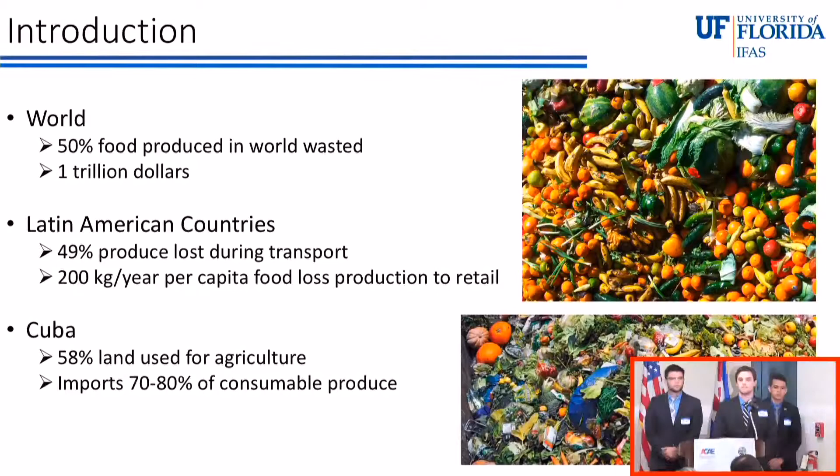Food waste is a major problem in both developed and developing countries throughout the world. Currently, 50% of the food being produced is wasted, which equates to $1 trillion per year. According to the FAO, or Food and Agriculture Organization of the United Nations, 49% of produce is lost during transportation in Latin American countries. Fruits and vegetables are wasted more than any other food product. Cuba is currently utilizing 58% of its land for agriculture, yet 70 to 80% of its consumable produce is still being imported.

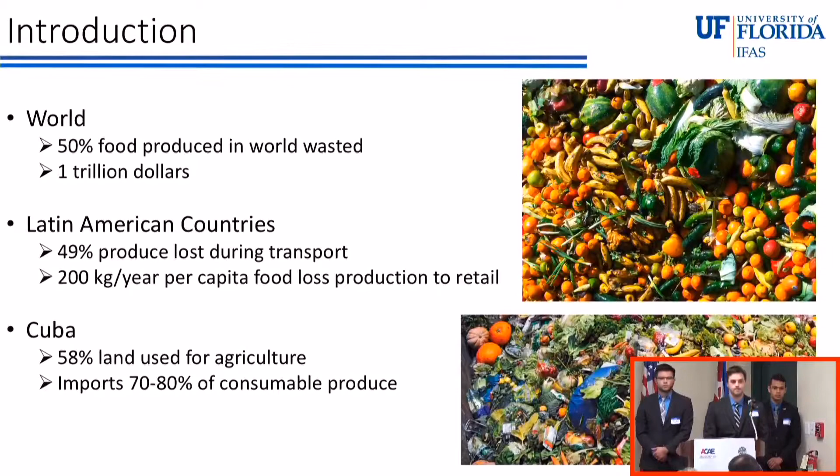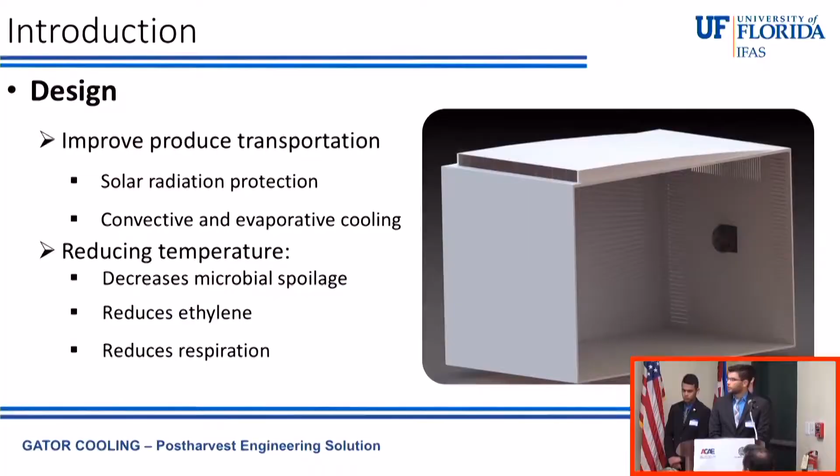Our design attempts to improve Cuban infrastructure by utilizing a shipping container that uses both convective and evaporative cooling, as well as solar radiation protection, in order to decrease shipping temperatures and maintain a more constant shipping environment for produce. Our design reduces temperature, which decreases microbial activity, as well as reducing ethylene production and reducing respiration, which decreases food spoilage.

So a little background information on Cuba. There's currently 11 million people, according to the most recent census, living in Cuba, with an average annual temperature of 21 to 27 degrees Celsius and an average annual high temperature of 26 to 32 degrees Celsius. According to the FAO, one of the most recent studies, an ideal transportation temperature for most produce is between 13 to 15 degrees Celsius. On this picture right here, we can see how the plantains are uncovered and exposed to solar radiation. This is causing problems during transportation.

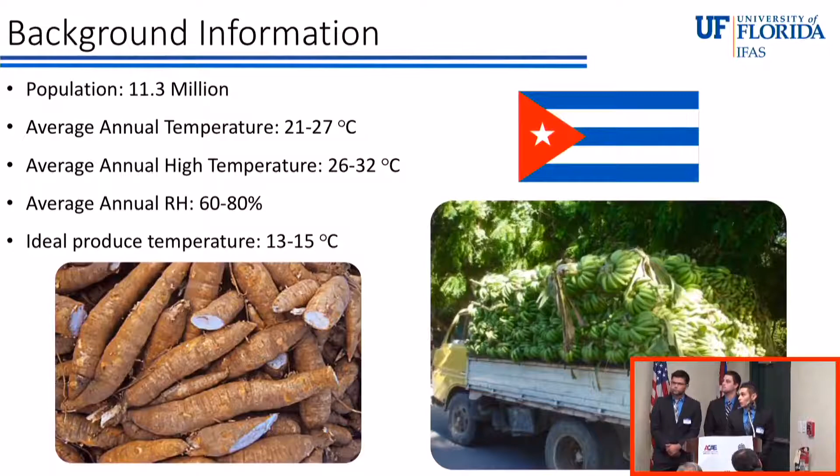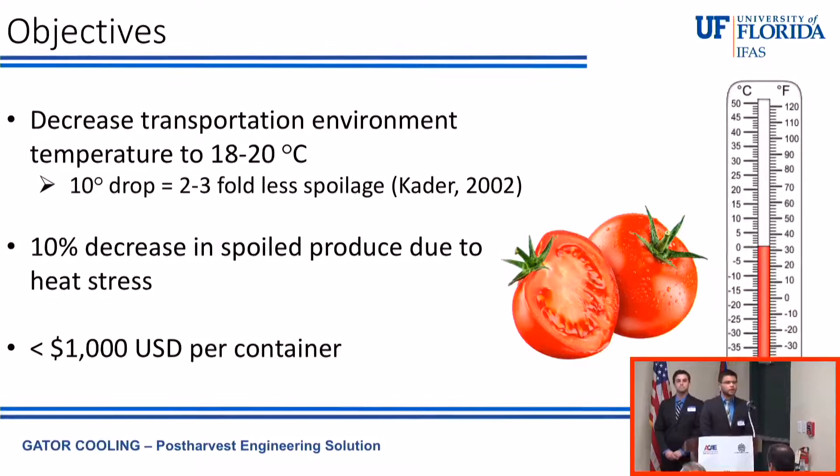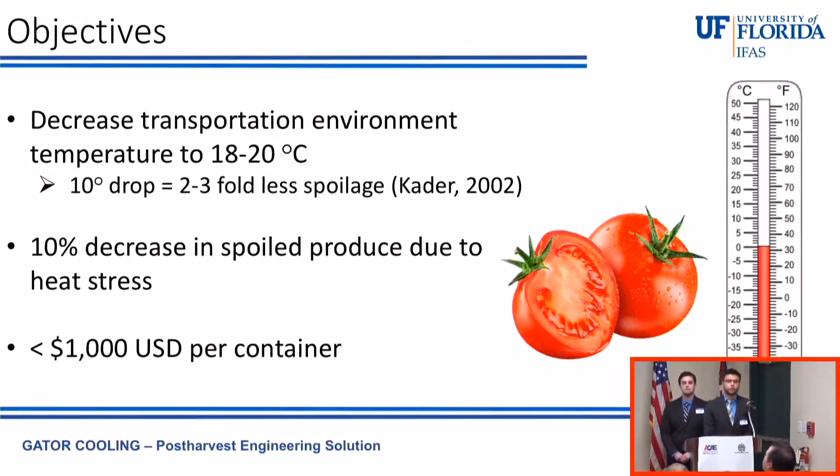So in order to provide the best design possible, we came up with the following objectives. We wanted to maintain a shipping temperature of 18 to 20 degrees Celsius within the container. Although this is not within the range that Diego just stated of 13 to 15 degrees Celsius, a 10-degree drop in temperature usually yields about a 2 to 3-fold decrease in food spoilage. Secondly, we wanted to decrease the total amount of food spoiled by about 10%. Finally, we wanted to maintain the cost of this container under $1,000 in order for it to be more easily implemented by Cuban farmers.

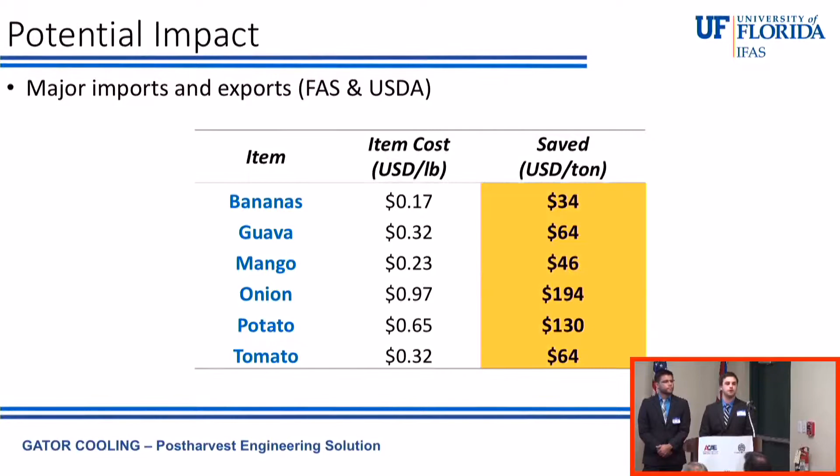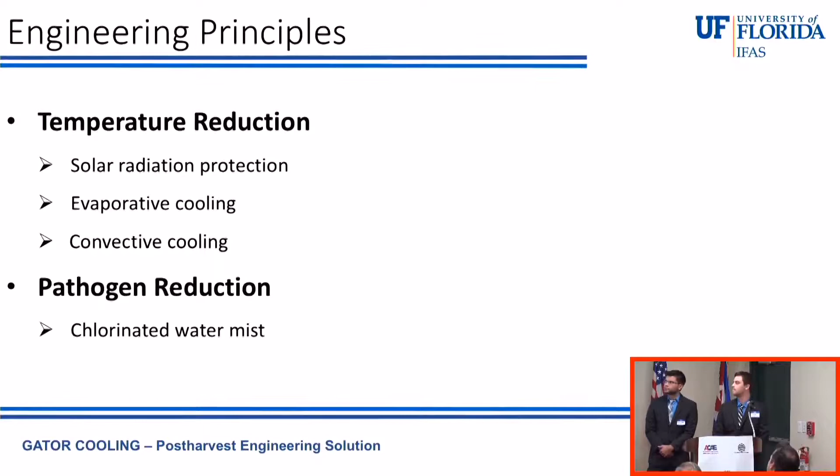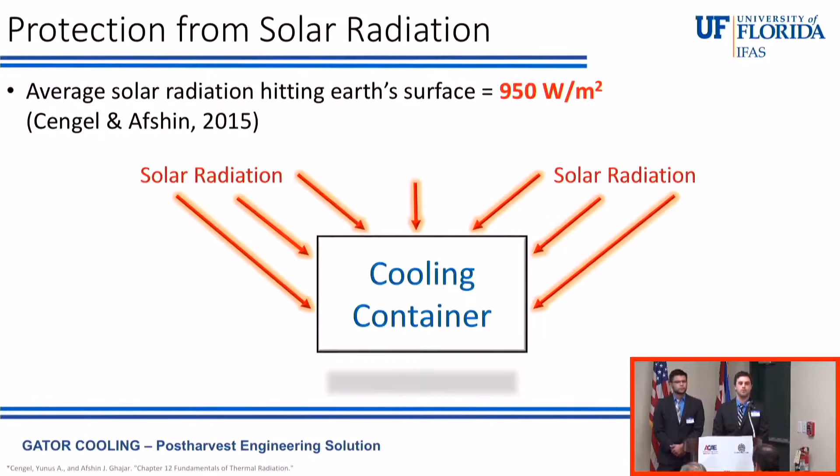Solar radiation is a key source of heat resulting from the sun's rays hitting the produce. It is known that 950 watts per meter squared of solar radiation can affect produce during transportation. Current methods being utilized in Cuba are not accounting for this. By utilizing our design, which covers the produce, and painting the exterior of the container white, this 950 watts per meter squared will nearly be eliminated from becoming an issue.

Evaporative cooling is what makes our design unique and helps reduce temperature even further. The annual wet bulb temperature of Cuba is 25 degrees Celsius, and this can be reached through evaporative cooling alone.

A water tank attached to the side of our container will hold up to 198 liters of water, and this essentially means that it can go in transportation for up to 6 hours of water being dispersed into the fine mist spray. The way it works: the incoming hot air will come in contact with the fine mist spray and then cause an evaporative effect inside the container, decreasing the air temperature inside and cooling the produce altogether.

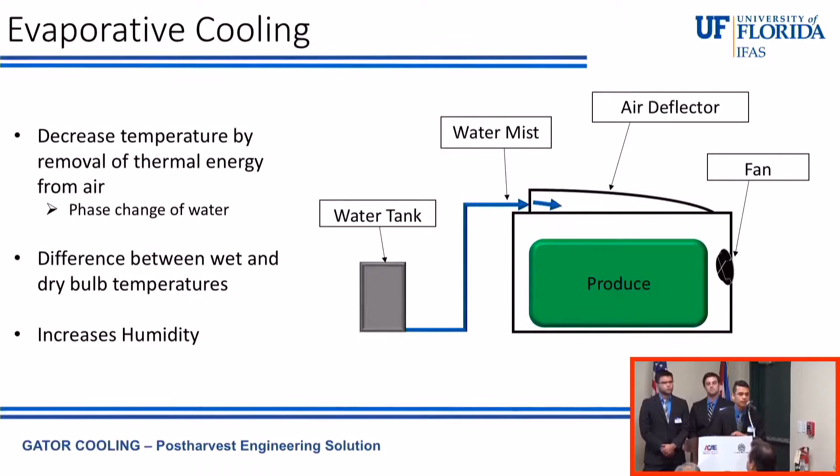It's similar to when your body sweats and there's water droplets on your body. The water droplets evaporate into the outside air and cool the skin on contact.

This is the convective cooling effect that will occur as the incoming air comes through and over the produce. The incoming air will go through the air deflector and cause a convective cooling effect inside, cooling the produce, and an extractor fan will then remove the excess air.

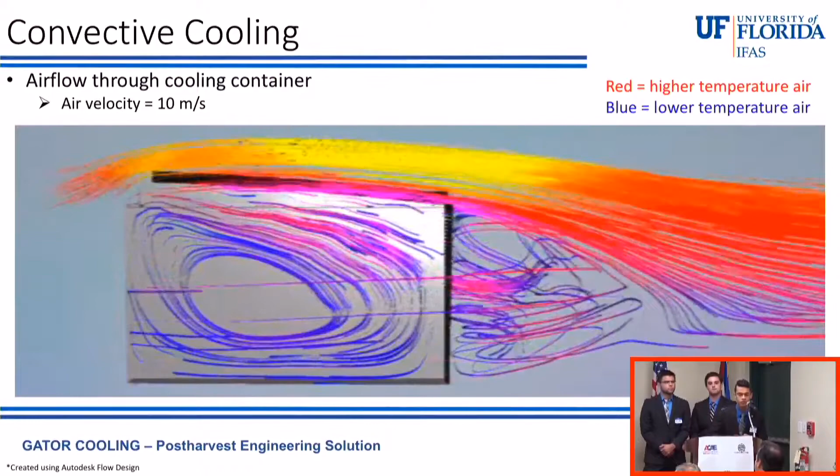Whenever produce respirates, it actually emits heat also, and the extractor fan will help extract that to cool the inside of the container as well.

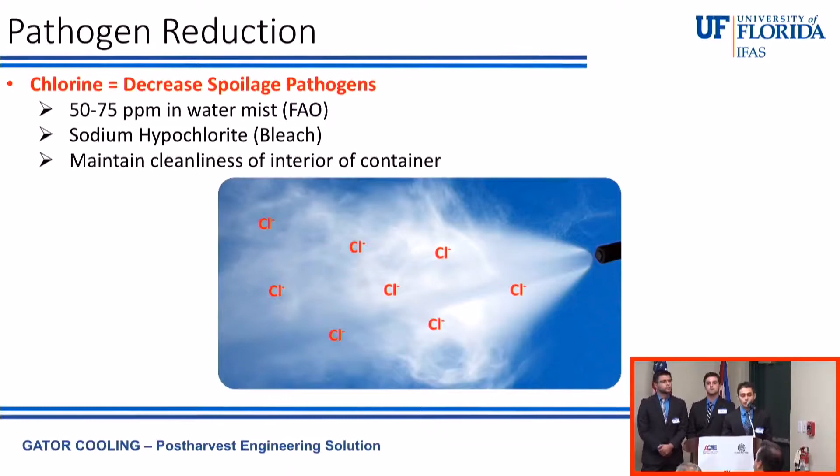One of the final ways that we wanted to reduce pathogen buildup was by implementing chlorine into our water. We wanted to dope the water with chlorine, so when it's misting over the produce, it'll be able to kill pathogens. According to the FAO, if we were to keep the chlorine concentration between 50 to 75 parts per million, this would be sufficient to kill any buildup and maintain our container clean as well.

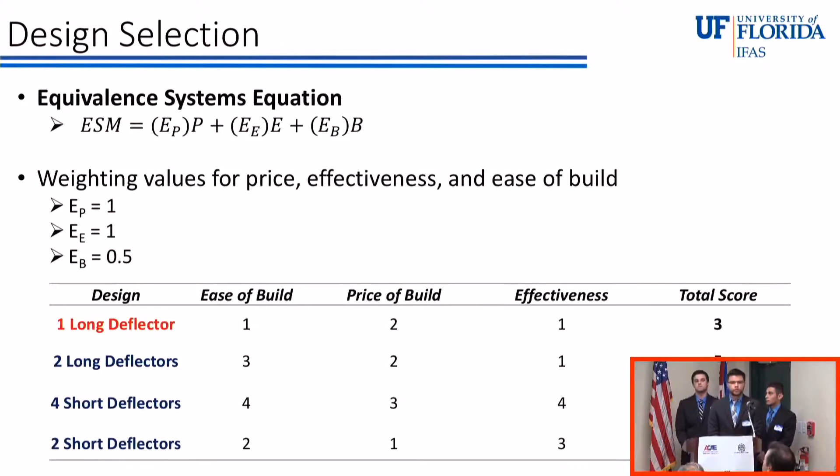In order to select the best design possible from our original models, we came up with an equivalence systems equation where we take the parameters of price, effectiveness, and ease of build of the container. We came up with the final design here, which is one long scoop that covers about 90% of the total surface area of the top, because it received the lowest score from our equation and weighing factors.

As Luis and Diego stated earlier, this is a small model of how the container would work.

Air would come in through the front scoop while the truck is in motion, and it will direct the air on top of the produce, thus reducing the heat within the container. While the truck is stopped, however, there is no ram air going in through the deflector.

Therefore, we implemented this fan that simulates the movement of the truck, thus allowing further evaporative cooling due to the sprinkler system that would be in the front of the scoop, as well as the convective cooling on top of the produce inside and out the back through the slits on the fan.

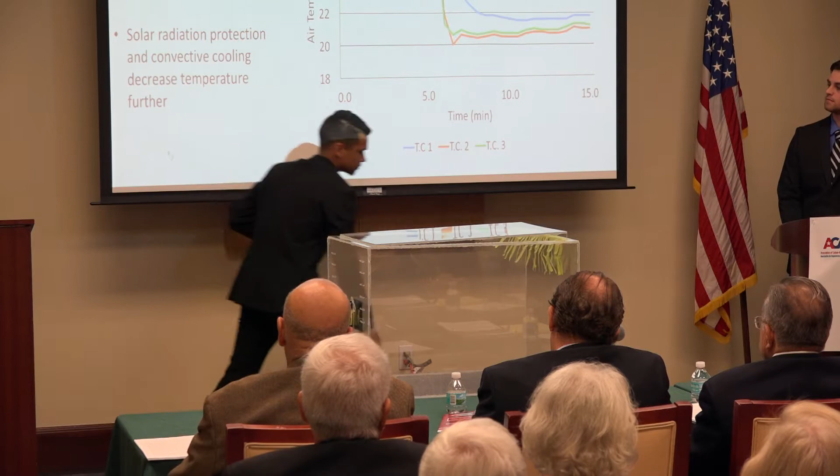In our testing, we had the fan programmed to turn on at a 25 degrees Celsius measurement. This does not necessarily have to be used, but it was used to improve our test readings.

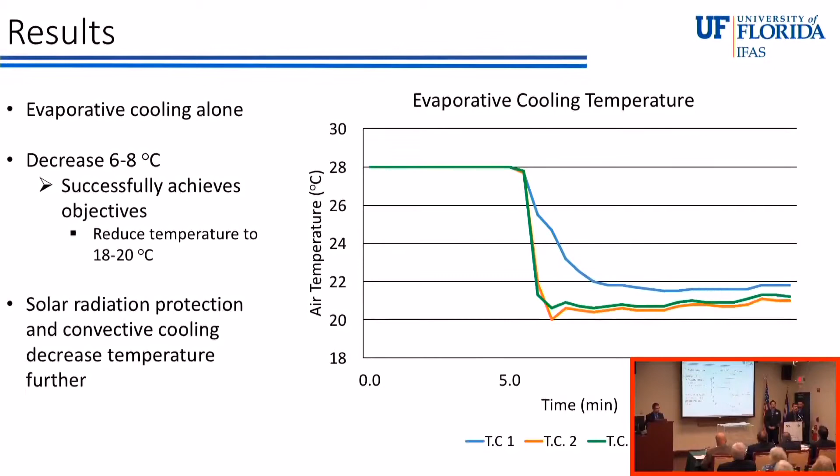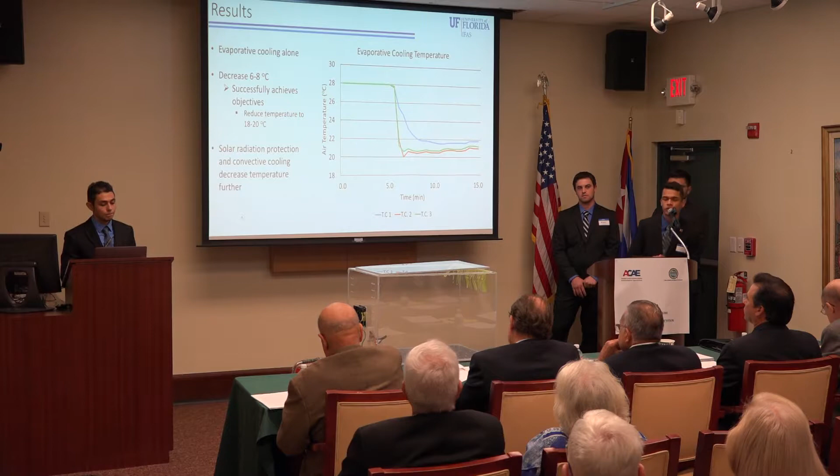After our testing, we were able to determine that our objectives were met, and the internal temperature of the container was able to be decreased by 6 to 8 degrees Celsius. It began at 28 degrees Celsius from a temperature control room because that resembles the relative humidity temperature in Cuba, and then it was able to be decreased to 20 to 23 degrees Celsius after our testing.

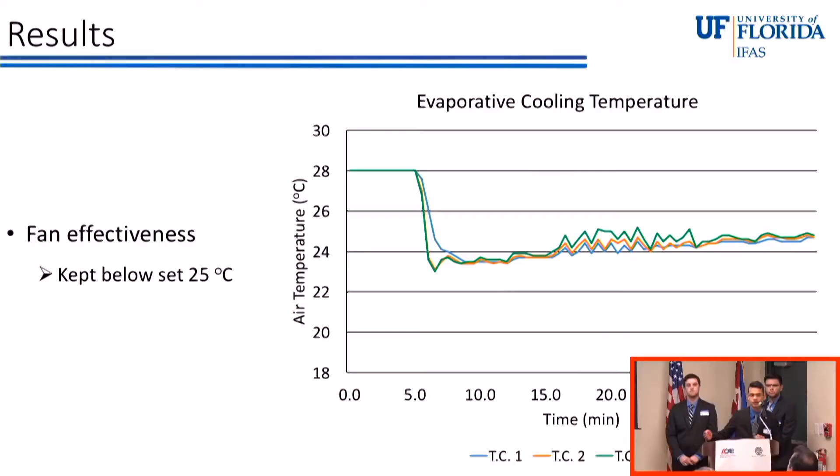The fan was actually able to keep the temperature lower than 25 degrees Celsius throughout the entire testing parameter, so it shows that it was an effective method of testing.

We have estimated that our design will cost about $860 to implement. This can be compared to a refrigeration trailer, which would cost about $14,000, or a refrigeration truck, which would cost about $60,000. Our design is a lot more cost-effective and can be easily implemented, and can easily cover its cost of build and implementation within 1 to 2 trips, depending on the produce being transported.

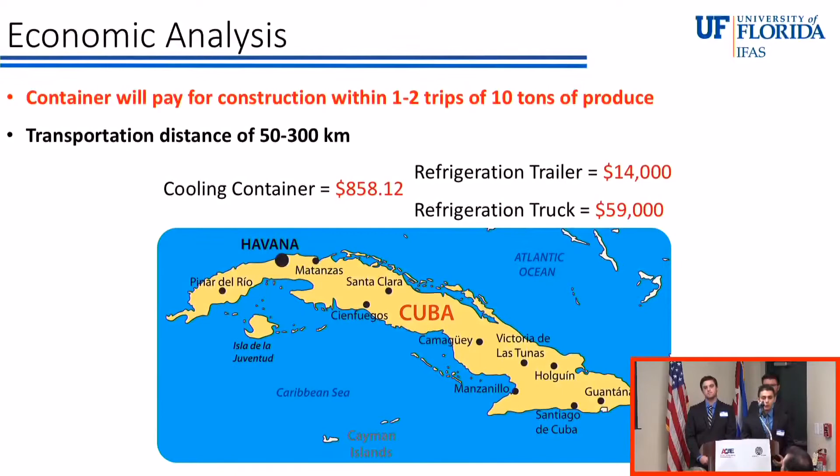When edible food is wasted, more must be produced. This means more water must be used, more energy must be used, and more fertilizers must be used. According to the FAO, 65% of the water being used in Cuba is going towards agriculture. 7.5 million gallons of petroleum fuel are used each day, according to international energy statistics.

By wasting more food, agriculture is also intensified. This means more land is cleared and more fertilizers are used. Cuba is currently utilizing 179,000 tons of nutrients in nitrogen, phosphorus, and potash fertilizers each year, according to the FAO. In addition, Cuba's agriculture alone produces 11.6 million tons of greenhouse gas emissions each year.

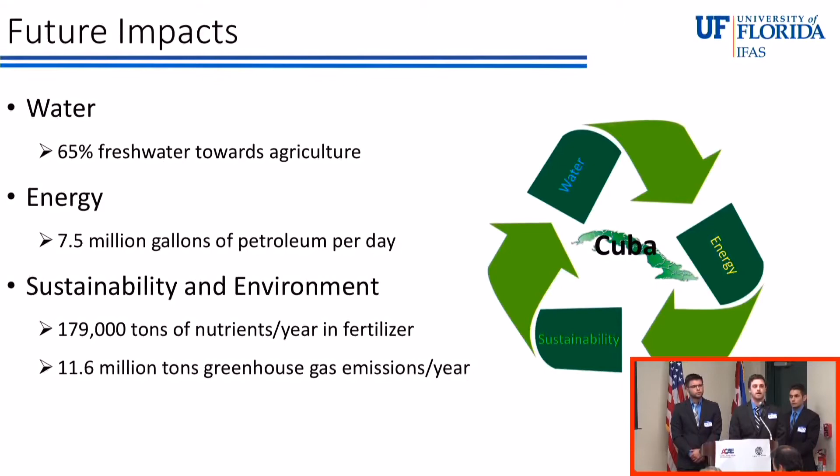By utilizing our design and reducing food waste, Cuba will use less water, will reduce its energy impacts, and become a more sustainable country with a more sustainable agriculture system.